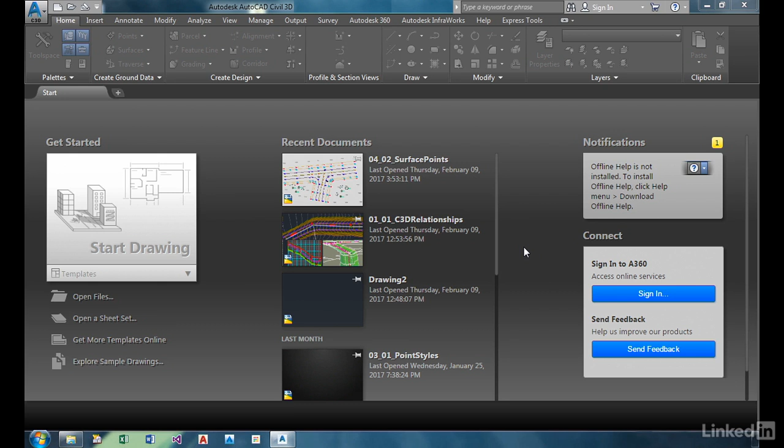Now that we've learned what a surface is in Civil 3D, points, and then the triangles that connect the points, let's go ahead and create a surface using Civil 3D points. We're going to go to our drawing and our exercises 0402 surface points. And you see within this drawing, we have many Civil 3D points already in the drawing. So what we're going to do, we're going to create a surface and use those points.

You can create a surface from the Home ribbon, Create Ground Data panel, choose Surfaces, and select Create Surface. We're going to create a surface of the existing ground, so we're going to name our surface existing ground. It's always good to put a good description in here as well, information of where the surface came from, and maybe even the date of where that information came from.

But notice that the surface layer is already set for us, as well as the style. The surface layer is being set from our object layer settings, and then our style is coming from our feature settings, default styles. So it's good, again, to remind ourselves that having those settings in place speeds up the work by only having to just enter a name, everything else is ready to go.

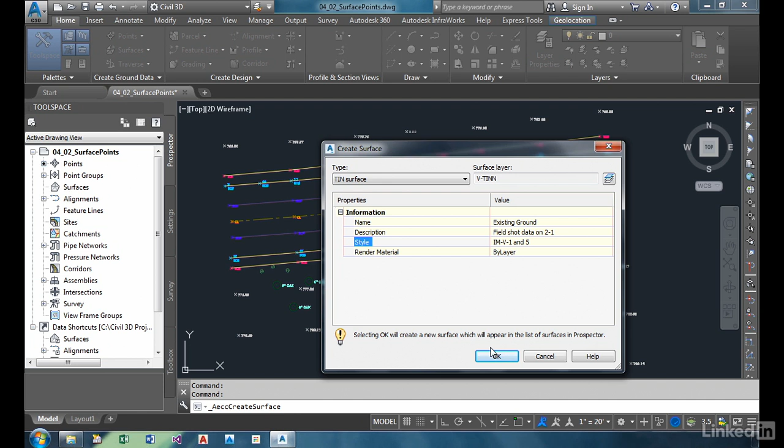We click OK, we go to Prospector here, under Surfaces, we see our new surface has been created. Now it doesn't show up in the drawing because we haven't provided any points. Without any points, there's no triangles. Without triangles, you have no model. So let's add those points to our surface. So existing ground, I expand that out. I expand out Definition. Here's a list of all the items that really play into defining our triangles.

So the points and the information we can get those points from is connected with our point files, point groups, even getting information from the survey database or survey figures. We can even provide drawing objects, and it will read the drawing objects and the coordinates of start points and endpoints and so forth of AutoCAD objects to derive those points for the surface. Additionally, we'll provide information that will impact the triangles as well.

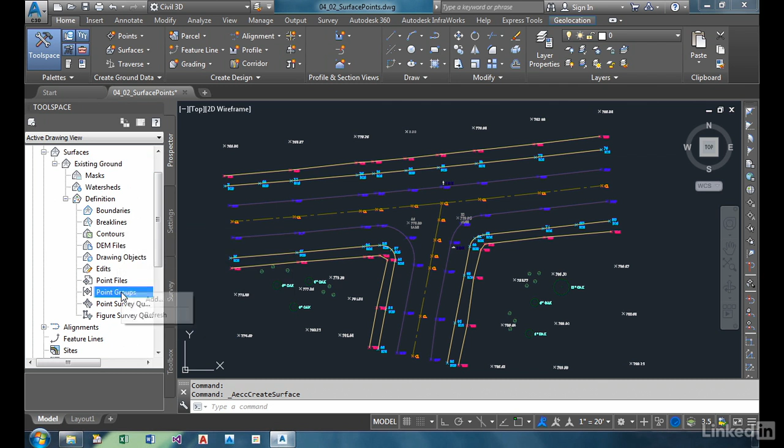Now, to begin with, let's go ahead and add our point group to create our surface. So I'm going to right-click and choose Add, and there's only one point group in the drawing, all points. This is a good reminder as well. This is another example where point groups would be very powerful. We could create a point group that has nothing to do with visual control of our points, but contains all of the points that have vertical data, data that would be useful for creating a surface.

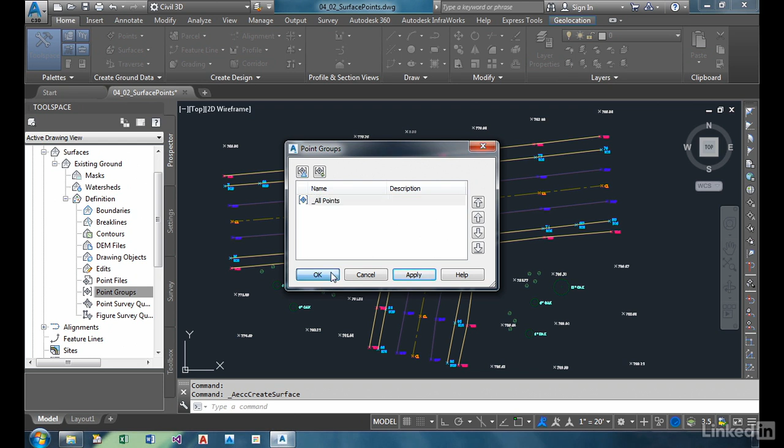And we can name that point group just along that line of surface data. That way, we're not grabbing all of the points. We're just grabbing the points that are specific to creating a surface. So we see the power of point groups in many different ways. But we're going to go ahead and use all points point group. We click OK. Now, because it had the points, it was able to create the triangles. Triangles, of course, give us the ability to display contours. So we have a good start here.

We do have a bit of a spike, and we see why. We have elevations of 773 on one side, 779 on another, and 770s really seem to be the general elevation of the area. And right in the middle, we have an elevation of 0 on the point. We're not going to assume that's a bad shot. It could be a point that's just connected with a property boundary or something similar where vertical data wasn't important. So we can't delete the point. So we could create a point group and not have that point included in that point group.

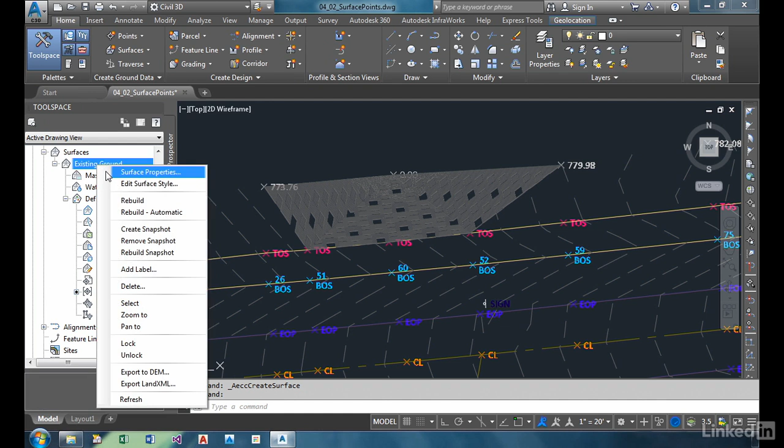Another approach is by making some adjustments to the surface properties. I want to right-click on my surface in Prospector and choose Surface Properties. Now, from the surface properties, we're going to go to the Definition tab. In the Definition tab are the abilities to control options to define the surface. Some options are exclude elevations less than, exclude elevations greater than, control the maximum angle of your triangles, and so forth.

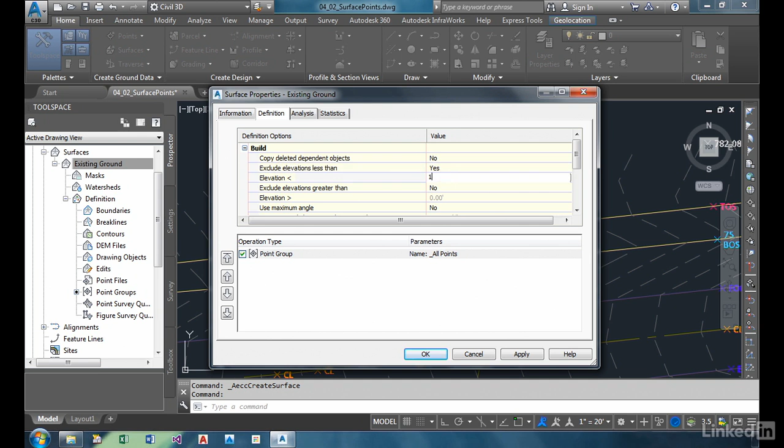We're going to choose to exclude elevations that are less than, and then we're going to set an elevation in here of 10. Well, we have elevations in the 770s. If there's any elevations that are included that are 10 or below, chances are they're arbitrary elevations and don't apply. So we're pretty comfortable with that. We click OK. It asks us to rebuild the surface.

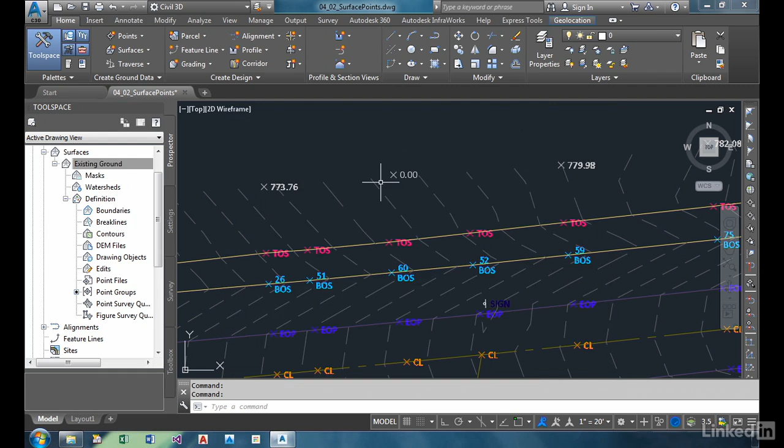And now this point is completely ignored. Although it's in the point group that we've entered, it has chosen to ignore that because of some build options in our surface properties. So here's a good start, but there's more to it than just adding the points. We now have to also control the direction of the triangles.